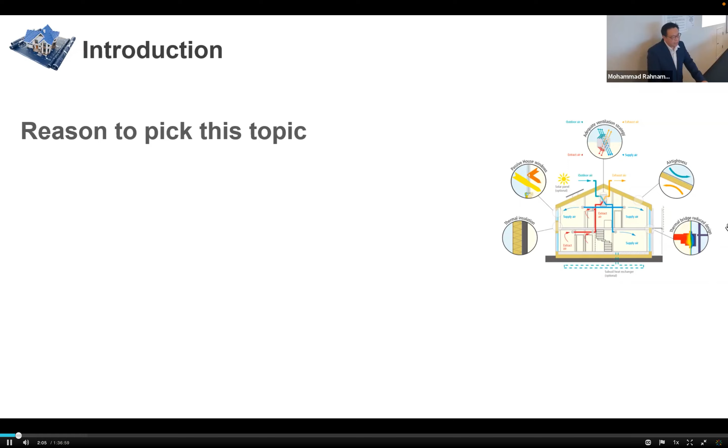So I'm so interested. If the building envelope is well built and with good consideration, it will save my money and save energy. So I'm interested in saving my money. So I choose this topic. And also, I can apply all the study I did in energy management into this study.

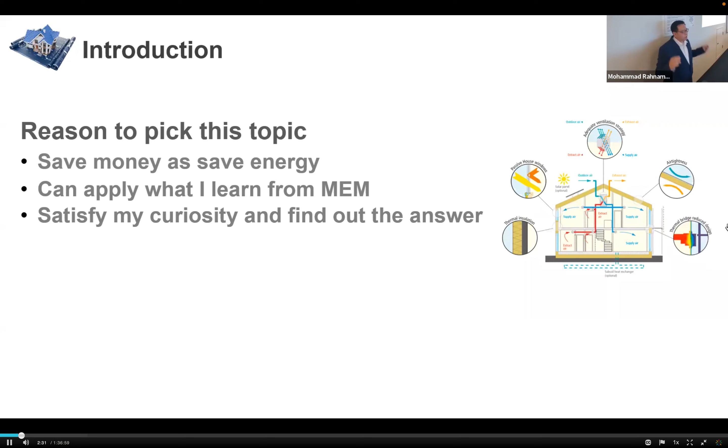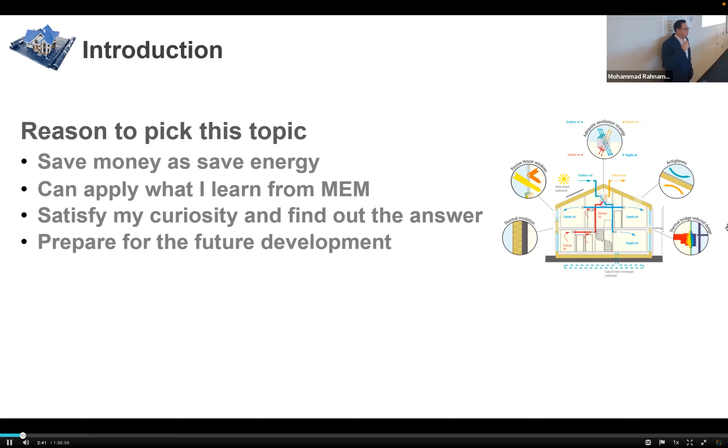Recently, net zero energy building is quite a hot topic. And I wonder if it is possible to have self-generated energy fulfill the whole building operation. So I need to find it out. Finally, I would like to prepare for my future development. Why this topic is so important for my future career development: the building energy consists of 39% of greenhouse gas emission, and also 36% of total energy consumption.

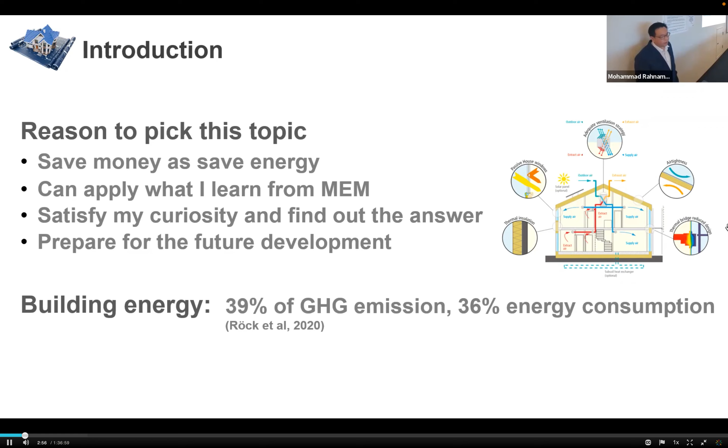So let me give you some background information of the net zero energy building. What is the net zero energy building? That is very easy to consider. The building's self-generated energy can fulfill its building operational energy on an annual basis. But now many people will challenge the net zero energy building. Why? Because it will destroy the natural habitats.

And also, many buildings are built in remote areas. So people did not consider the logistic cost or transportation cost, or even in the future, for the people living there, the commuting energy costs. So now I would like to present the feasibility of the deep retrofit on the building rather than the newly built building.

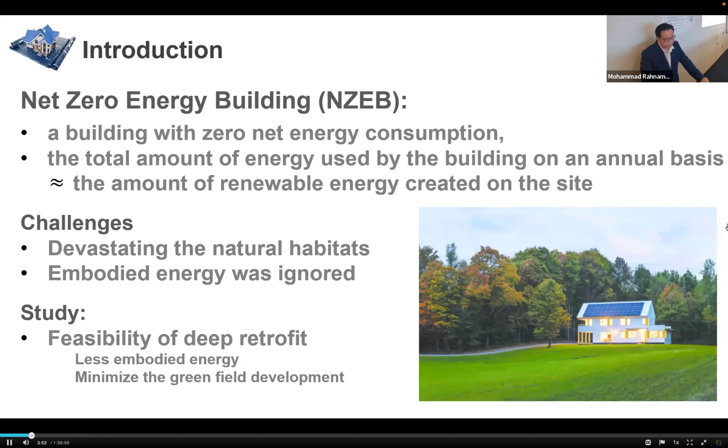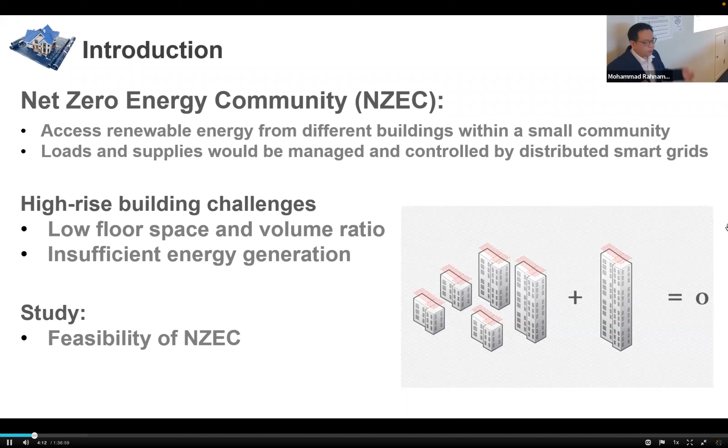Another one is when we're facing the high-rise building, the floor space and volume ratio is very low. So that means it only has a limited area for me to generate the renewable energy. So it is a problem. But the net zero energy community may help in this case.

About my assumption, first of all, let me introduce a term that is embodied energy. What is that about? That is the life cycle energy minus the operation energy. So what is that? Life cycle energy means from material, from cradle to grave, what energy is involved. But we have sufficient data to analyze the operation energy of the building. So we minus it. That is the embodied energy.

Another one is the solar insolation. When we are on the Earth, different locations will receive a maximum insolation from the sun. And normally, the panel tilt angle is equal to the latitude angle. So we just take this assumption.

Also, during my computer simulation, for many parameters requested, I can't get the optimum one because, let's say the R value, I need to have 60, but the maximum I can choose is 40. So I picked the maximum one in my study. Finally, it's about the heat pump and HVAC. Most likely they need to take the air source from outside, but the temperature of the air source fluctuates. I just take it as a constant in my calculation.

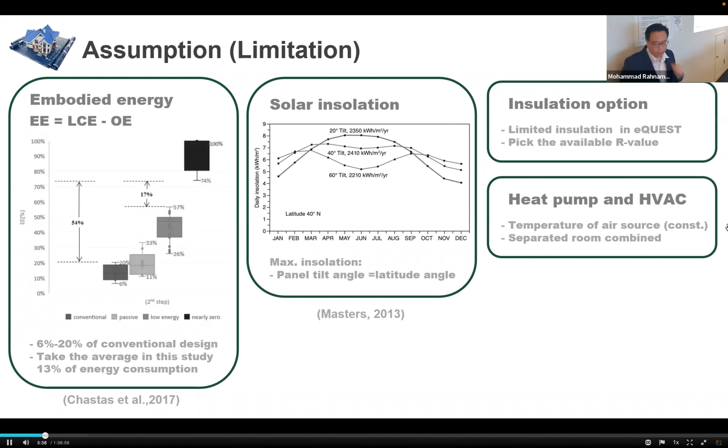So what I'm going to do is study the energy analysis of these two projects, two buildings. And I have already studied the net zero energy building measures, which include the external wall, windows, roof, lighting, natural gas, and some pumps and motors. We apply this technology know-how in the improvement. Finally, I will use the computer simulation to see the before and after energy performance.

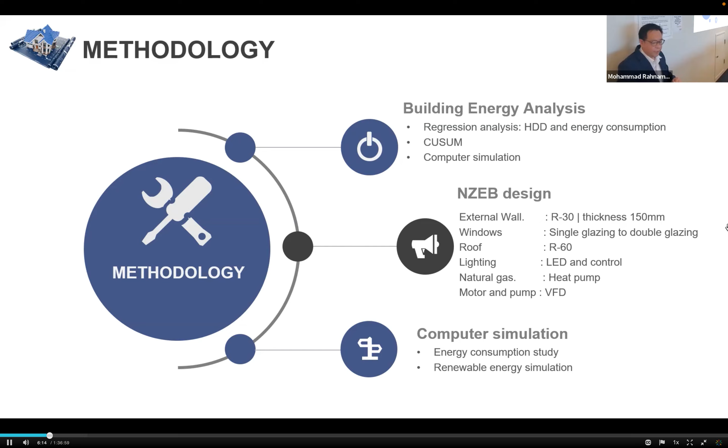About my findings, I'm going to present two main projects, which are in British Columbia. One is the Rosewood Village. And for these two projects, the information I got on hand, we mainly rely on the information which we studied in energy management 6 and 10, because it provides more detailed information to me and lets me do a detailed energy analysis.

And about the Rosewood Village, it is quite a large area with three types of building, which are low-rise buildings, just 1 or 2 stories. That includes 1 office, 33 townhouses and 2 apartments, which are labeled in different colors.

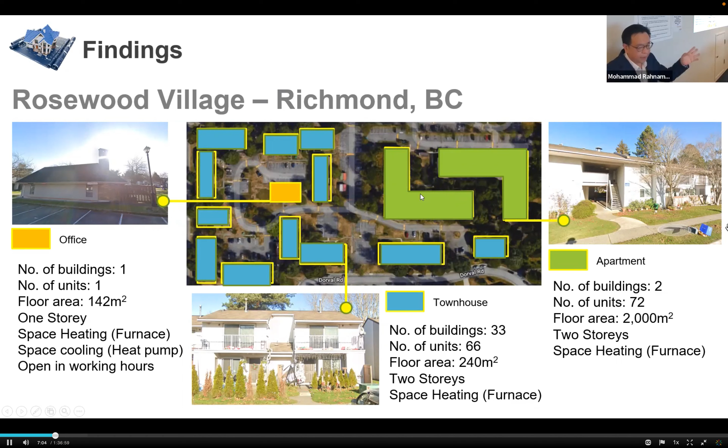So at this time, I would like to do the improvement. What I applied is what I've learned and studied in net zero energy building design. It includes the rooftop, above grade external wall, below grade wall, ground floor and floor type, glass door, window, and the ratio of window and wall, and some of the furnace and heating system, because the main energy consumption is in space heating and domestic hot water.

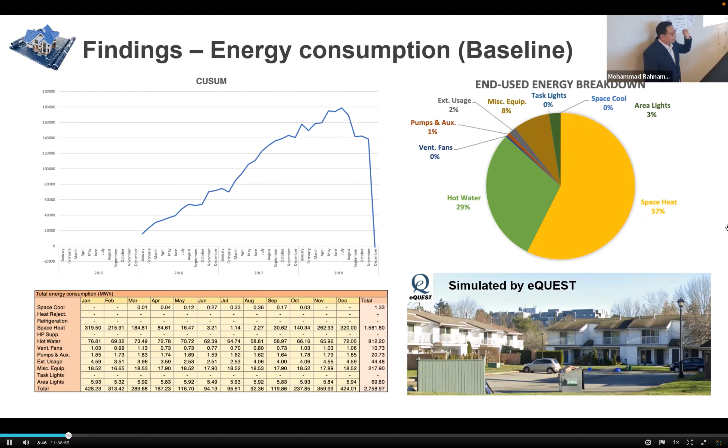After we make the improvement through the simulation of eQUEST, we can see the energy consumption is lower about 40%. Now it's 1,673 megawatt hour.

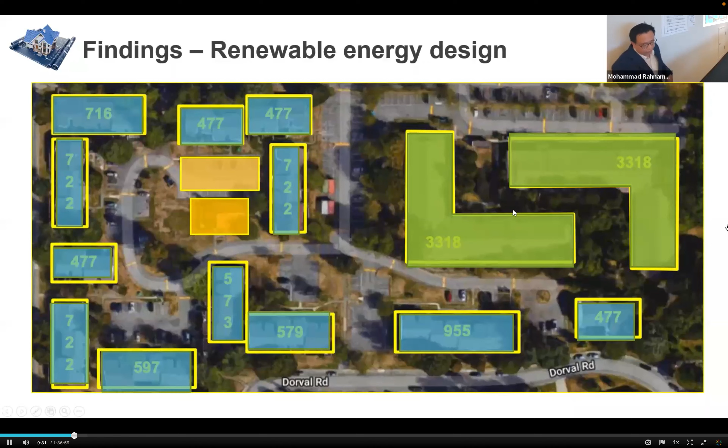After making the improvement on energy consumption, we need renewable energy generation. Here is the picture - I would like to construct the solar panel. The blue color is the townhouse, yellow is the office. I will also construct a car park canopy to obtain more solar energy power. The green one is the apartment.

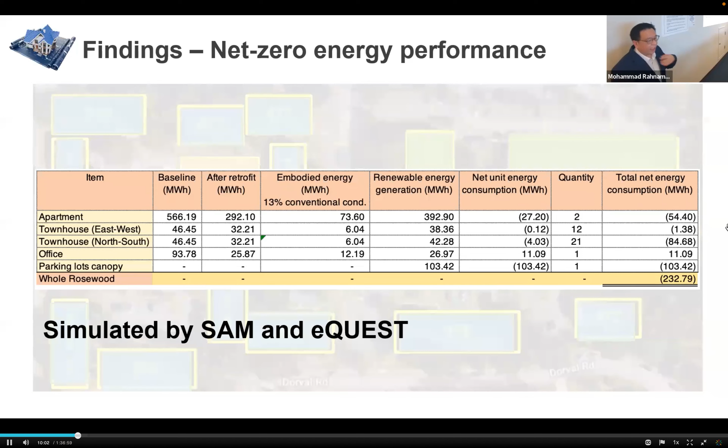So here is the performance analysis. After we have the retrofit, and I have calculated the embodied energy, which is 13% of the conventional energy consumption, we know that after all the calculation this project can achieve net zero energy and also have 232 megawatt hour extra - meaning I can generate and supply energy back to the grid.

Another project is Sunnyside Manor. It's a high-rise building, 10 stories, located in West Vancouver. And similarly, we do the same analysis on this project.

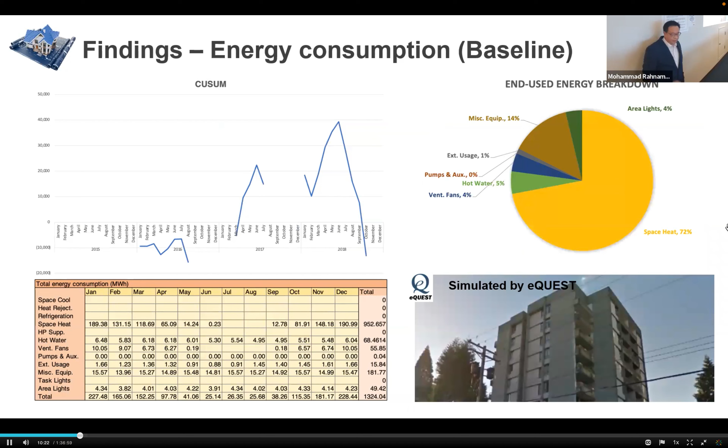The total energy consumption on the baseline, meaning I haven't done anything, is 1,324 megawatt hour. After we make the improvement, it can lower about 60%, to 500 megawatt hour. We did all of this using eQuest.

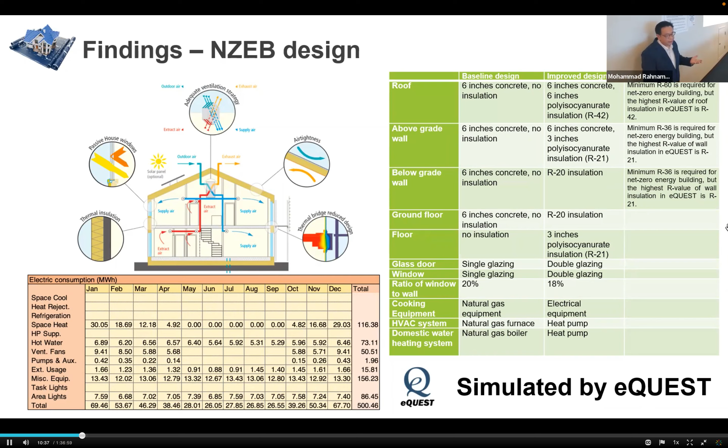But it only provides me a limited area, only a rooftop, so we can't achieve net zero energy building in this high-rise building. We can see annually we need 350 megawatt hour from the grid. So what should I do?

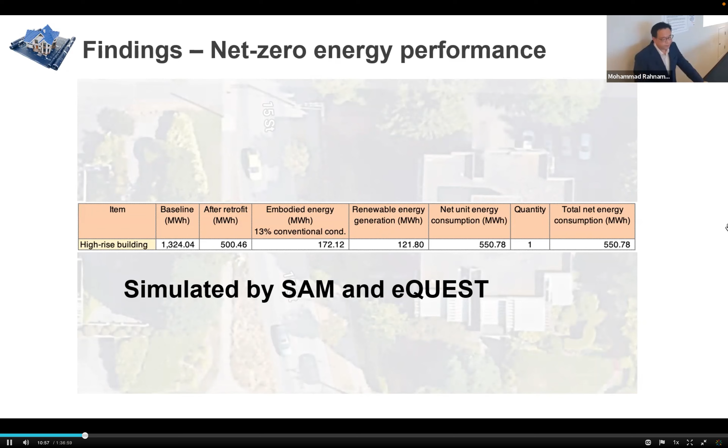So I studied the concept of a net zero energy community - making use of different types of buildings that have self-generated energy and consumption, sharing information through the smart grid to reallocate demand and supply, contributing across the whole building ecosystem.

In this study, our building is Sunnyside Manor here. There are many houses we can make use of, and also a fire station and police station. I also made use of fire station data from Fort St. John, which is a net zero building. I made use of the energy density and generated energy density and put it in the model to see if, by building every building with shared energy, we can achieve a net zero energy community.

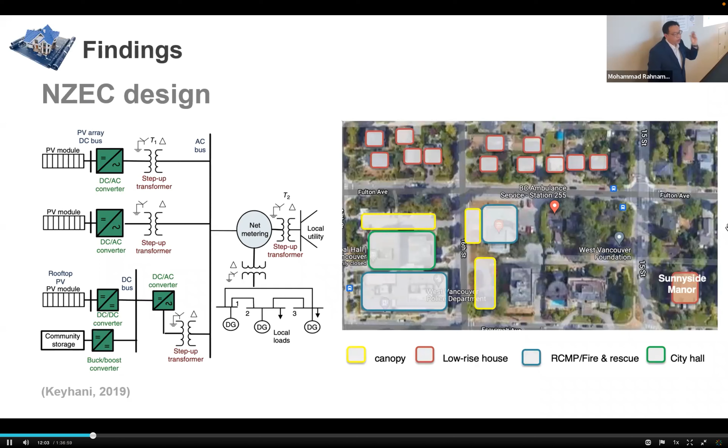So here is what I have done. For the high-rise building, yes, we can do it. But if we combine with the townhouse, police station, fire and rescue depot, government building, and some parking lots, we can get very tightly to net zero energy consumption, with some surplus but very little.

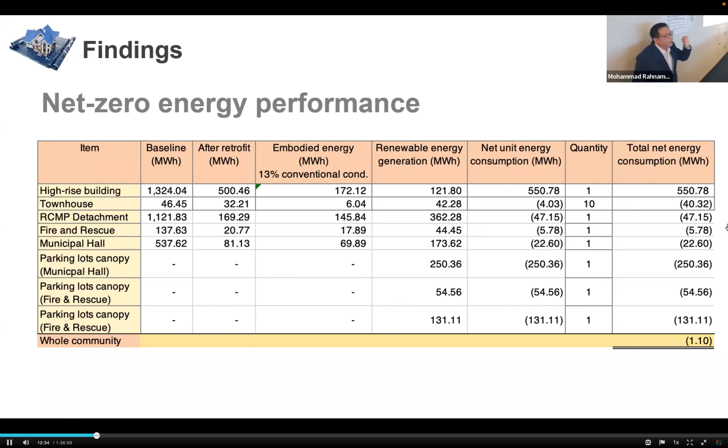As a conclusion, it is feasible to have a retrofit net zero energy building, which can eliminate the concern of greenfield development destroying the natural environment. We also encounter embodied energy, which is lower compared with a new build building. Low-rise buildings are of course easier to achieve, but for high-rise buildings, if we can get support from a cooperative net zero community, we can also achieve net zero energy building and community.

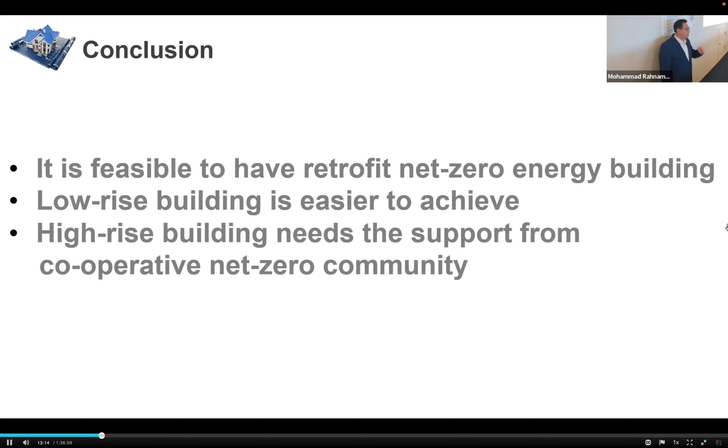Thank you very much, that is all of my presentation.

Question from you: we all know it's very challenging using uncompleted information in simulation. So how do you know your result will match reality?

How I do the baseline is I need to make sure my simulation from eQuest matches the data information provided. Maybe I'll show you - I have a recording because I can't do an eQuest simulation here. Last night I assumed somebody would question my study and my working, so I did a video. One moment.

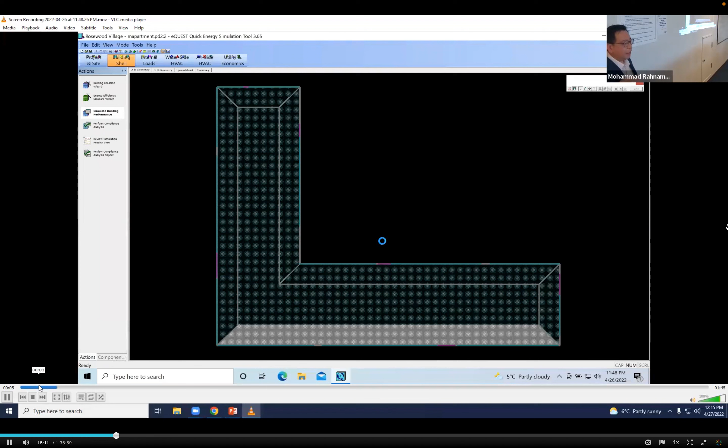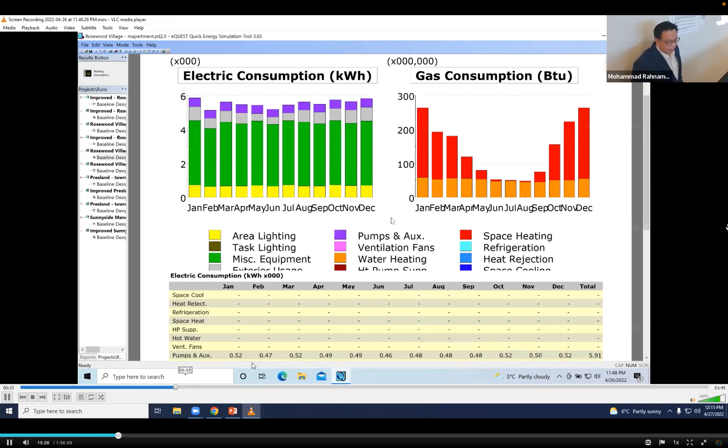What I do is after the eQuest simulation, I obtain the energy consumption like this. This is what I did in one of the apartment buildings in Rosewood Village. After the simulation, it outputs the energy consumption on a year basis. So here is the annual base, and I copy all the data, all the table to my spreadsheet here, but with different units.

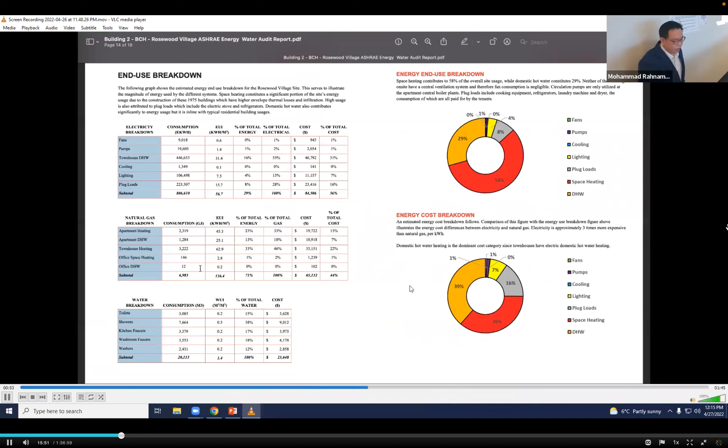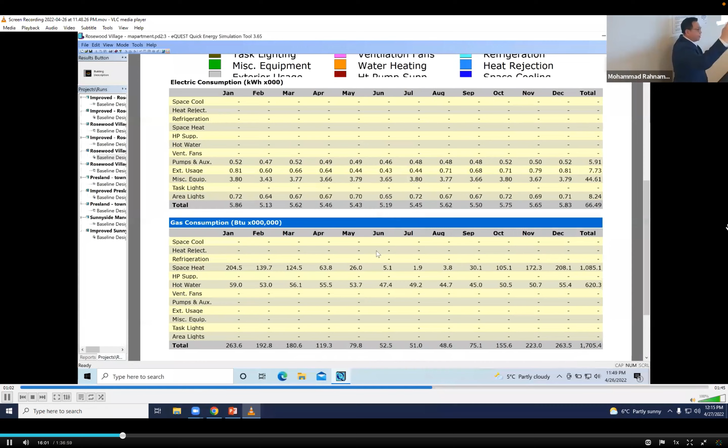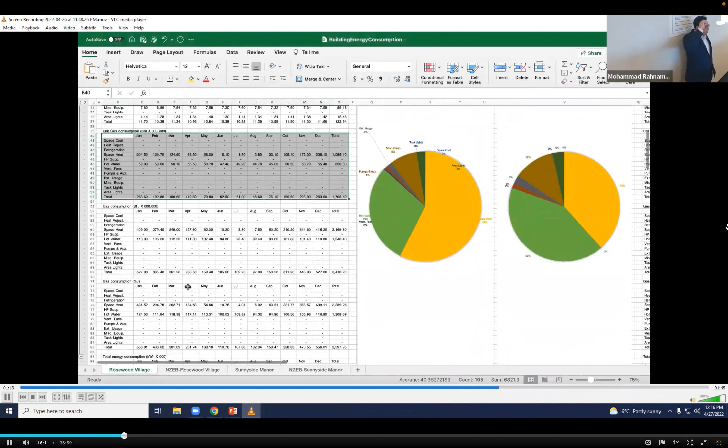I can use Excel to calculate different units in terms of the unit which fits the data provided. Like this one, the gas consumption in million Btu is about 1,700. But we have two buildings, so times two is 3,400 something. That's what we have here. So I validate every building's energy consumption like this to make sure the foundation of my data is correct.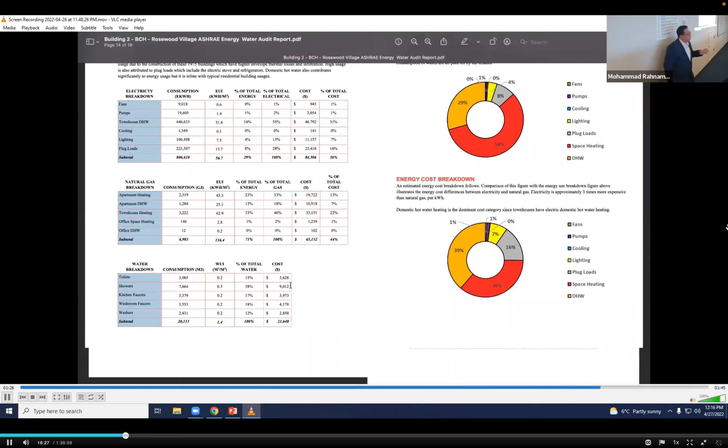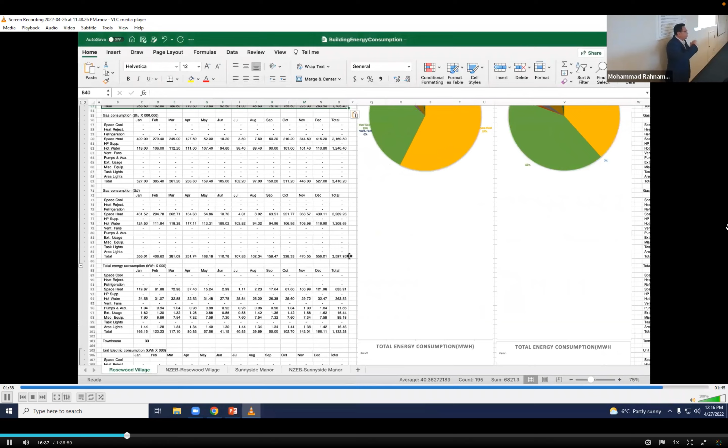I would say probably not, because first of all, I'm studying only a residential building, and the main energy consumption is the space heating and domestic hot water.

But if I apply it to some manufacturing, like an injection molding manufacturer, the main energy consumption is no longer the space heating, it's the machine energy consumption.

Second, as I read in a study, the energy consumption in a cold climate area is different from a hot climate area. Now I just take the case, but a very basic case in Vancouver, which is a cold or cold and moderate climate area. In a hot climate area, maybe the air conditioning will run all the time, especially for commercial buildings, so the energy model would need to be recalculated to see if it can apply. But up to this moment, my study only focused on the cold weather area and residential buildings.

Thank you. Yes, I got one question about the eQuest.

So when you use eQuest to make the model, you can either use Google Maps and measure the dimensions of the building, or you can use the AutoCAD file. Those are the two ways you can set up the model. Which one do you choose and why?